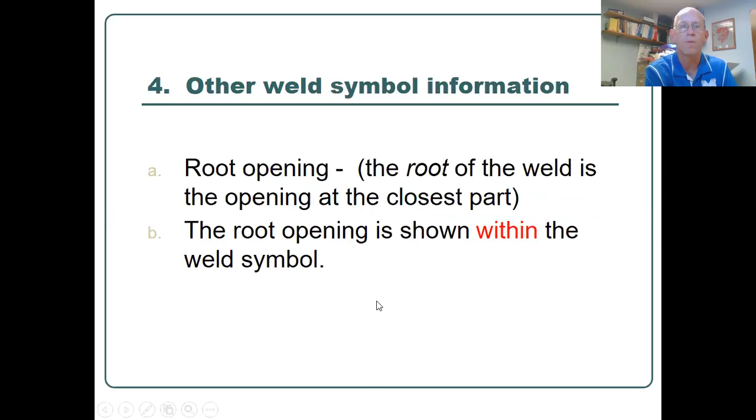So other things that we're going to be able to take a look at. We're going to take a look at specifying the root opening for a weld symbol. And of course, hopefully you know that that means that it's the opening at the closest part, usually at the bottom of the weld, although if we're doing something else, it could be the top part. But the root opening is going to be a number that's shown within the weld symbol. So in this case, it's the 1/8 inch.

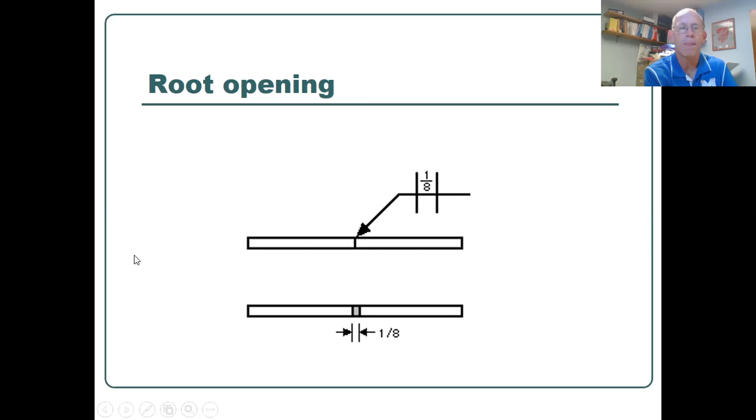That's a square groove weld. And when we finish it, it's going to have an 1/8 of an inch gap in there. We're going to weld on both sides because the symbol is on both sides of the line. But obviously, the 1/8 inch gap is going to be the same with both of them. Every one that I will use will be in fractions. I'm told that like hay and forage, they use metric. So that could be in millimeters. And so you'll see those in that case also.

Let's take a look at this one. You got 3 different numbers there. Which one of those is the root opening? Is it the 1/4 inch, 3/8, or 1/8 inch? Well, if you listened, it's going to be mostly a fraction, and it's always going to be in the weld symbol itself. So in this case, it is the 1/8 inch.

If it is not indicated, and that should be an important thing that you put on your notes, then it's going to be a 0. And so sometimes we're not going to specify. If the engineer doesn't want there to be any kind of a root gap, then they'll just leave it, and you should know that that would end up being a 0 at that point. Okay, so that's one thing we can show within the weld symbol.

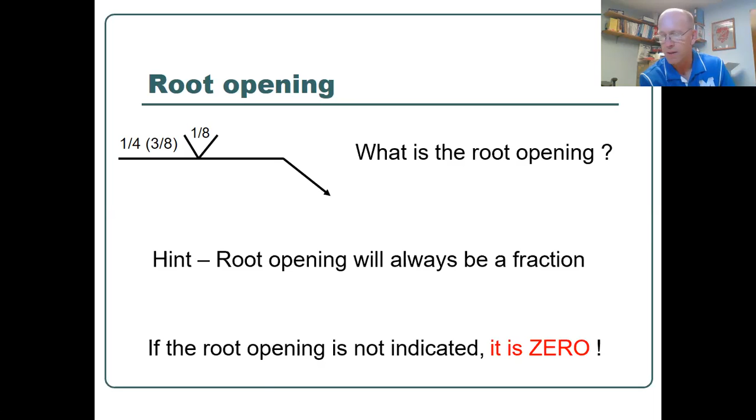The other thing is the groove angle. So for definition, those need to go into your blanks there. It's the included angle or the total angle, and it's shown above or kind of within the basic weld symbol itself. So the example we have here is a 60-degree angle, and we're going to have a V groove. It's below the line, so it's arrow side. The arrow is pointing to the top, so this would be correct in placing it on the top.

And we're going to bevel both pieces of metal with a track torch, a grinder, or a plasma torch, or something like that, and put a 60-degree bevel in there, 60-degree included angle. So we're going to put a 30-degree angle on both pieces. That adds up to 60. And so go ahead and sketch it on your notes page. There's a place there that says sketch these. So go ahead and show that. Hopefully that'll help you when you come back to having to do some problems with it, okay?

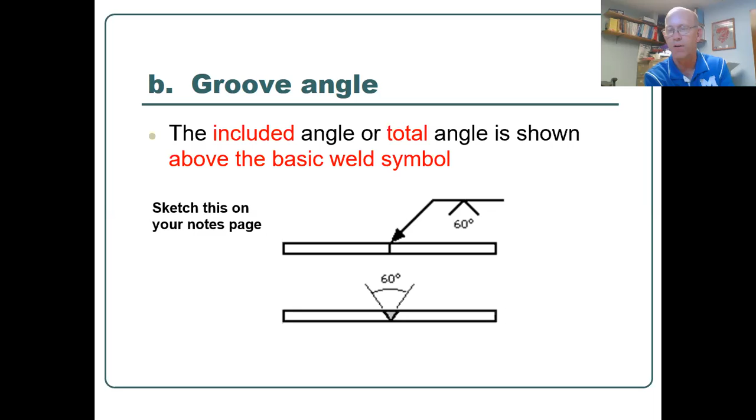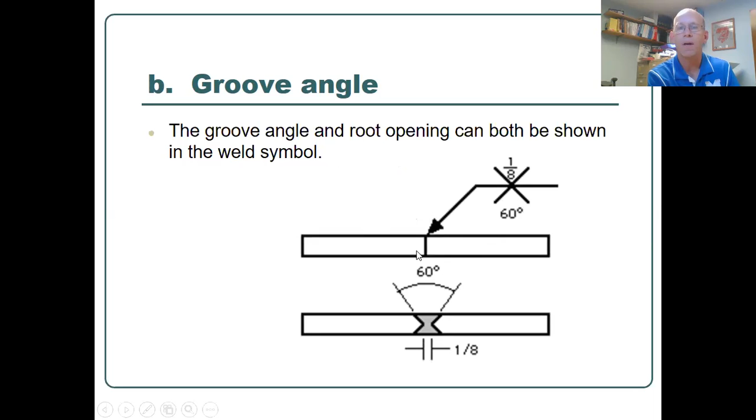We're gonna move on to the second part. Oh yeah, this isn't in your notes, but groove angle and root opening can be shown in both. So here we have a pretty thick piece of metal probably that we're going to put a V groove on both sides, and we're gonna have an 1/8 inch in the middle, and we're gonna have a 60-degree opening. We would assume that would be on both sides, but I have seen them where you would indicate a different one. But if that's what it would be on this one, I would put a 60-degree bevel on both sides halfway through.

So now this is the one that's on the bottom on the right hand side of your notes. Go ahead and take a minute and sketch what this one would look like. Where would it be beveled, top or bottom, and what would the angle be? So pause this if you need to and sketch that in real quick.

And I will show you what it should look like. We'll have a 40-degree angle. The arrow is correctly pointing to the right-hand side, so that would be the side that we would bevel. We always want to bevel the side that the arrow is pointing toward. That's what the engineer would want.

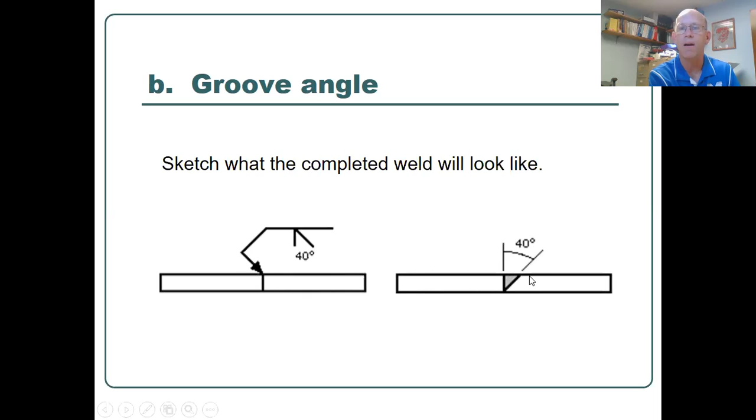All right, on to your next page. Should be a second page of notes. Contour symbols: we may want to indicate a certain shape of a weld that is finished. And so again, you want to sketch these in that space below where it says flush. Flush, another way of saying it is just flat. We want to get it flat, so that we can weld it to where it's pretty well flat. To get it perfectly flat, obviously we would need to grind it.

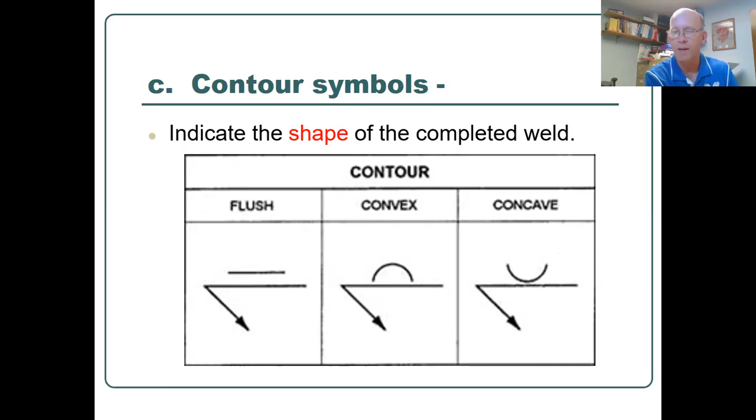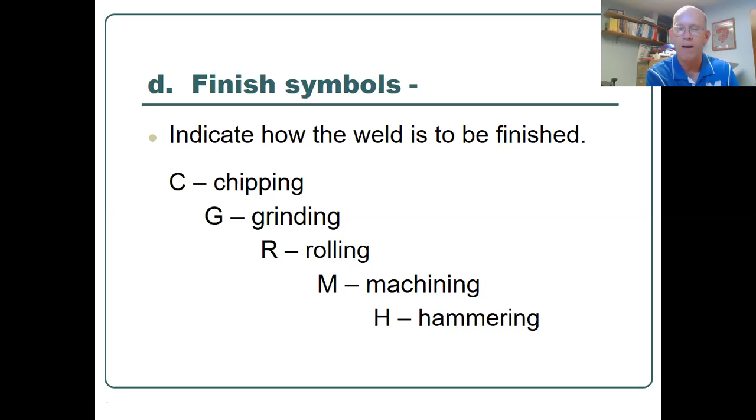But again, you might write that down. You'll need to know this, and I would hope that you could refer to your notes when we move on through that. And then we can use them in conjunction. Again, this isn't in your notes, but just something to look at. We could show that we want a flat on the bevel face. And notice how these are situated too. When we show them, they should be on the face of the weld.

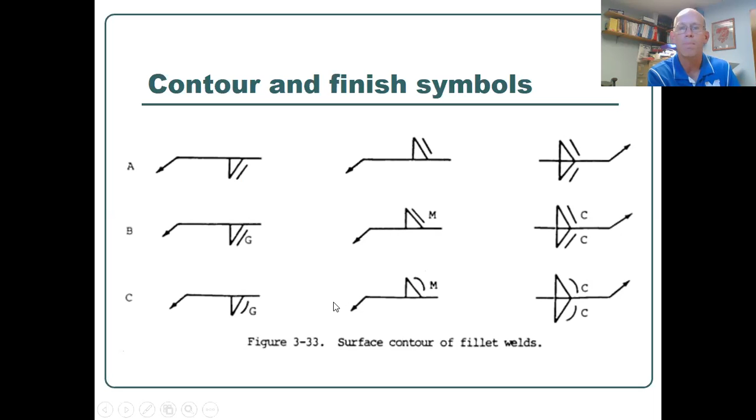So on a fillet weld, your contour symbols go on that angled piece because that's where the weld face would be. And so we could indicate them on both sides. This one would be other side. This one on the left-hand side on B would be the arrow side. So just a little graphic to show what those would look like.

All right, let's talk about the size of a weld. It's really, really important that this is different if we have a fillet weld, which again is a 90-degree, or some kind of a groove weld where we are beveling or putting two pieces of metal together that we're butting up. If we're doing a fillet weld, that's going to refer to the length of the two different sides. Okay, so the length of the sides is going to end up being the fillet weld size.

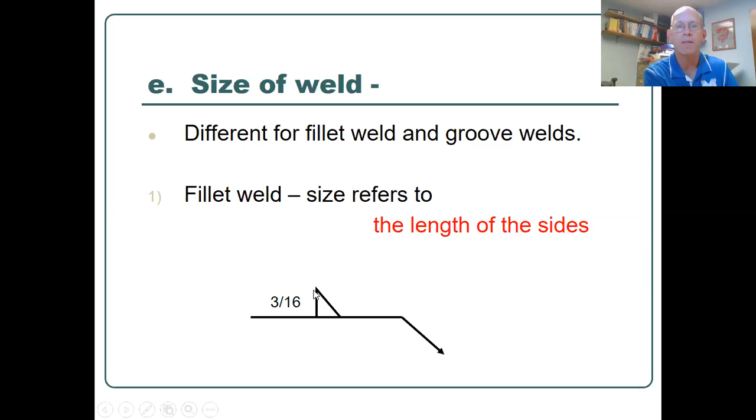So for example, if I have a 3/16 here to the left, that means that this vertical edge and the horizontal edge are both going to be 3/16 of an inch. This one's a little bit different. The 5/16 would indicate that it is coming out and up 5/16. It is not the face of the weld. And so if you have a weld gauge to size these, that's an easy way to indicate what that size should be.

And as you get into more advanced welding skills or competitions, you'll need to be able to get the right size of a weld. 5/16 is a pretty good size weld. And important to note, very important to note, the size is always to the left of the symbol. I already have that there on your notes, but I would sure put a star beside that or circle it. I always have students that come back and say, where do I indicate the size? Well, I told you to star it on your notes, so I'm telling you, put a star beside that. You've got to know that.

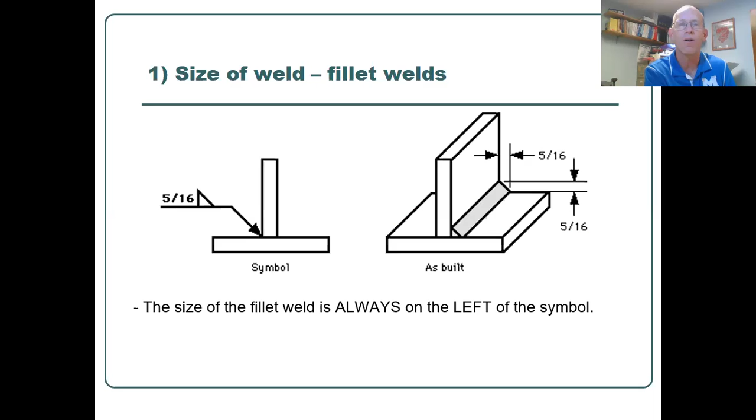All right, here's where it gets tricky. If only one number is given, which is normally the case, the length of both sides is the same. That's almost always what you see. So just like that 5/16, it's going to be the same on both sides.

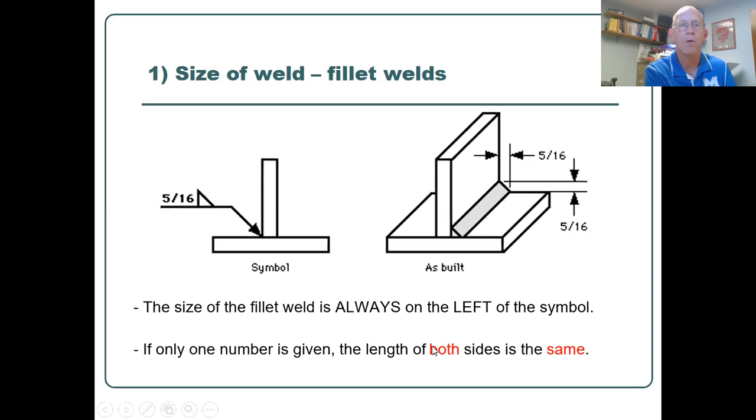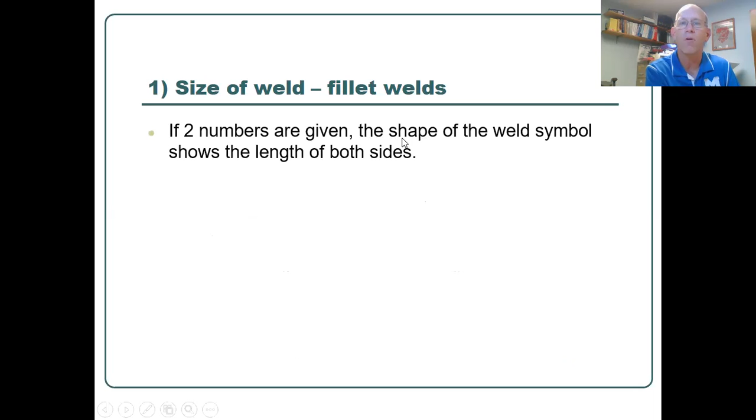So the vertical leg and the horizontal leg are the 5/16 of an inch. But if we give two numbers, then the shape of the weld symbol shows the length of both sides. Please underline the word shape, and hopefully we'll refer back to it, the shape of the weld symbol. So let's take a look. This one doesn't do a really good job of showing that, unfortunately. I should have a better graphic.

But if I have two numbers, 1/4 or 3/8, which one's bigger? The 3/8 of an inch is a bigger one. And so we would draw this symbol to where that line would extend out a little bit more and be a little bit flatter. And so you should be able to look at the symbol itself and understand that that was going to come out a little bit further.

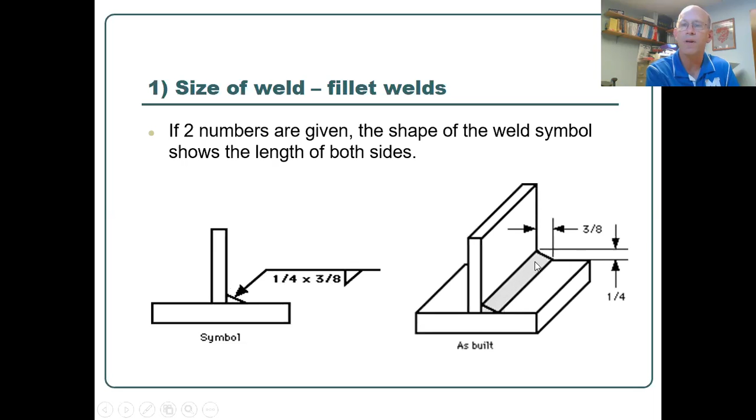There's a lot of reasons an engineer might want to do that, not just to make your life miserable. But this is how the weld would look if we were to finish that up. Again, we come out 3/8 of an inch, only up 1/4 of an inch. So not a big difference, but yet it would be significant if that's what the engineer wants.

All right, now, groove welds, two pieces butted up together. When we talk about the size of a groove weld, it's not how big the weld is. Size means how far are we going to grind or cut the base metal. So it's the depth to which the base metal should be prepared. Either we're going to do a cutting operation with a plasma torch or a torch, or grinding it with a grinder, which can take a long, long time.

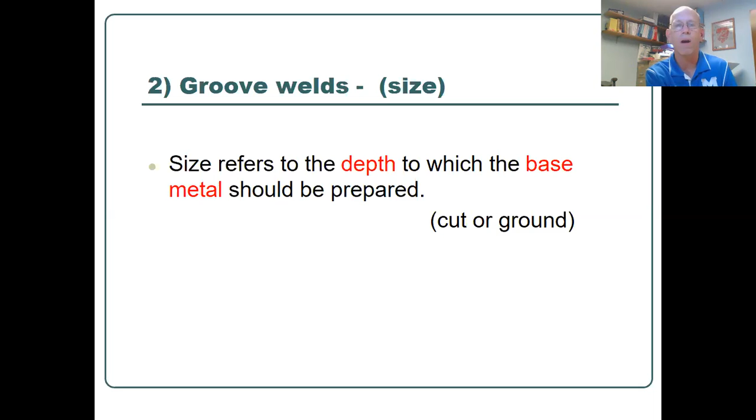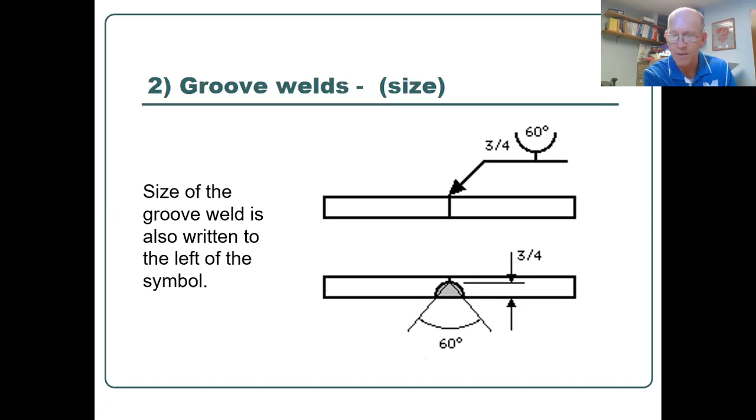It should also be written to the left of the symbol. Okay, so again, fill in the word left on your notes there. And again, that's important to know that.

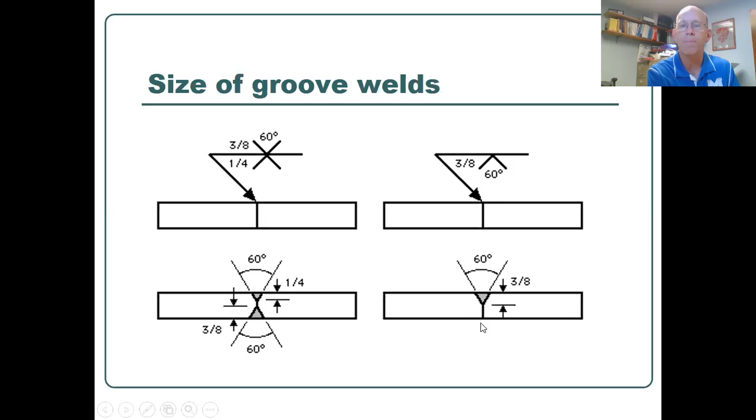So here's a couple of graphics, again, that indicate several things. It can be different. On the arrow side, we've got a 1/4 inch depth that we want to V-groove that out, whereas on the other side, we're going to go down 3/8 of an inch. And there's still a fair amount of material left in between there. Whereas on this one on the right, you've got the 3/8 of an inch. That's all the deeper we're going. We're not putting a weld on the other side, so apparently that's going to be strong enough for what they want to use that for.

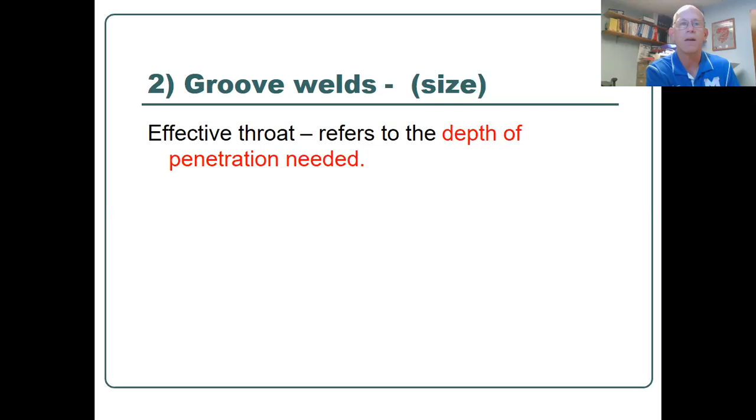Now, this term of effective throat, I've got it highlighted in your notes, and I think you ought to put a star beside that. The effective throat means how much penetration do I need into that weld? Again, we're talking a groove weld. So if we're doing some kind of a weld for a bend test, we would need to have it melt all the way through. So penetration is how far does it melt into the weld, but the effective throat would indicate to us how much penetration we want.

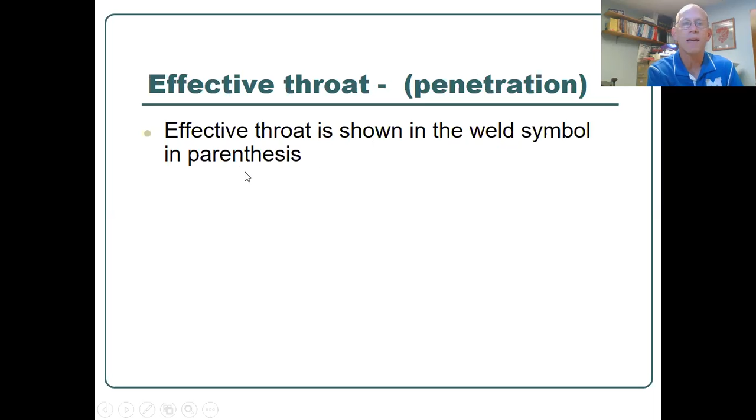A really important thing to help you identify which is which, it's always going to be shown in parentheses, and you need to write that down, that it's going to be in the parentheses, or circle it. I guess it's on your notes. But that's another one that gets really confusing for people. But it's an easy one to find because it will be in the parentheses. I'll show you some examples here in just a minute.

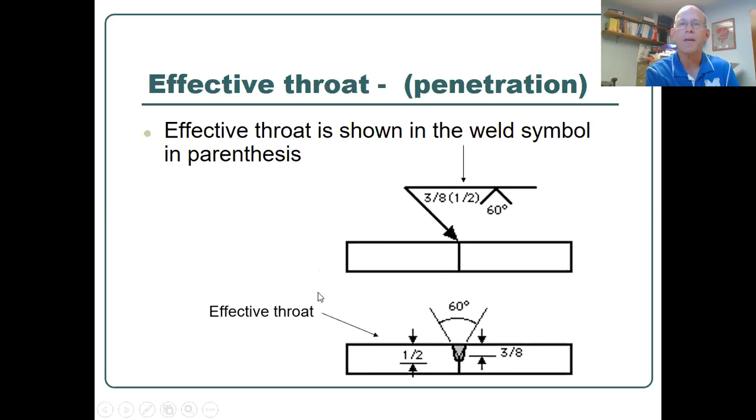Another one that is going to be tricky, that I catch a lot of people on: if it's not specified, the effective throat is, you would assume, the entire thickness of the metal. And on the worksheets that I give, if you don't tell me that, you've missed that point. So make sure that you understand effective throat.

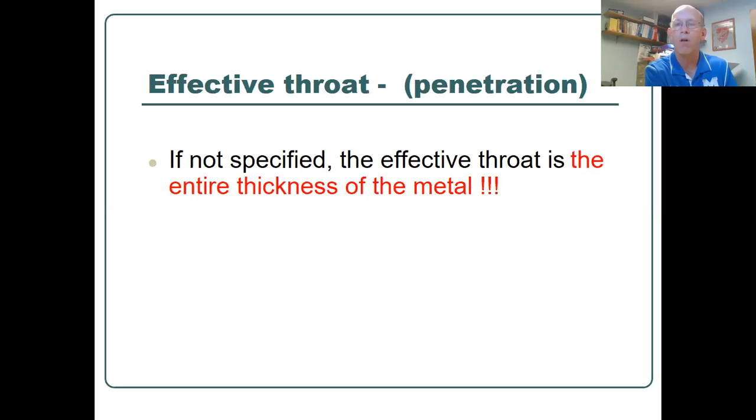If there's nothing there in parentheses and there's only one fraction there, the effective throat, the engineer or whoever's designing that wants you to make that melt all the way through the entire piece of the metal, like you would for a groove weld for a bend test or something like that. Okay, so hopefully we understand effective throat and the size. Size of fillet weld is different than the size of a groove weld. That's going to be challenging, I think, when you try to go back through it.

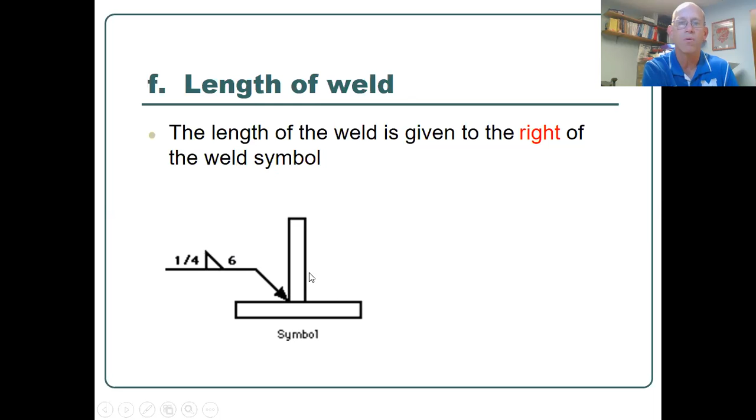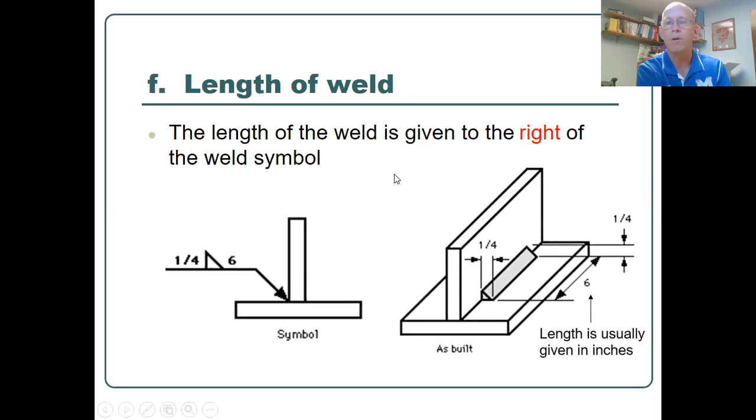So what would that look like? I guess you'd put it in the middle. There's some ways in which engineers might tell you they want to put it in the first half, but usually we're going to weld the whole thing, or we're going to weld a piece, skip, and then we'll put another weld in, which are intermittent welds, which we'll talk about here in just a minute. Normally give that in inches as well, unless you're, again, using metric, and then you would use metric on all of it. So let's talk about that.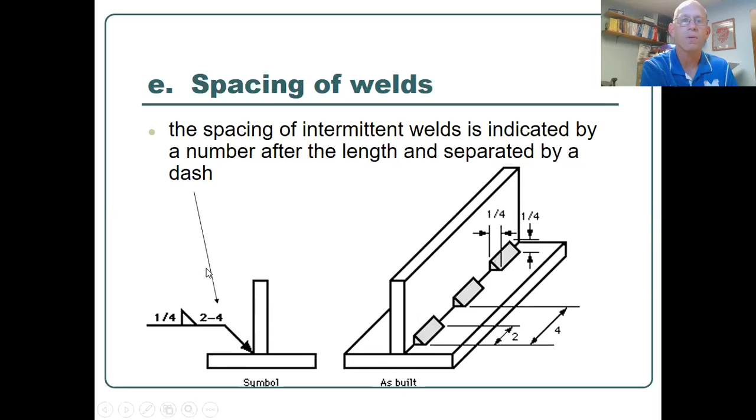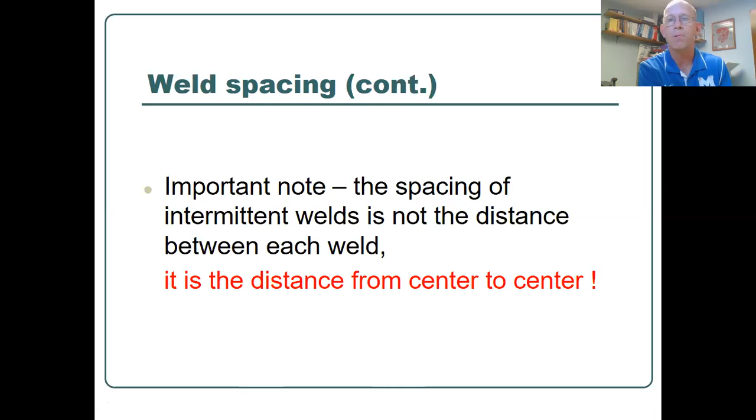All right, so it's important to note, and I've got that there on your notes, that it's not the distance between each weld, but it's the distance from center to center. Another thing I would add, it's also the distance from the beginning of the first weld to the beginning of the next weld. If it's the distance from center to center, it's also the distance from beginning to beginning. When we lay out materials like that, we'll measure them out. We'll just measure out that distance and put a tack everywhere where we've got that spacing where we want it to go. So we'll put a little tack weld there.

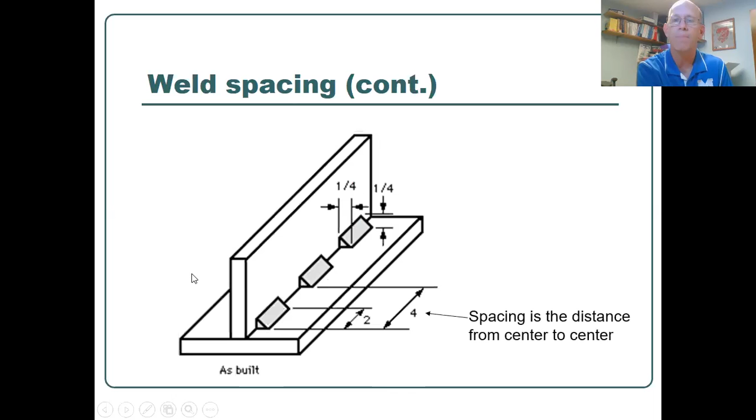So in this case, I'd come over, looks like they came in 1 inch. I'd put a tack at 2 inches. I'd skip 4 inches, put another tack, skip 4 inches, put another tack, because every 4 inches. So if you think about it, that means there's 2 inches, then there's 2 inches in between. Another 2-inch weld and 2 inches in between is how they're wanting that to be welded. But you just tack it up. We'll measure that if it's a long weld. Okay, so spacing is the distance from center to center, or from the beginning to the beginning of the next weld, is the easy way to set it up.

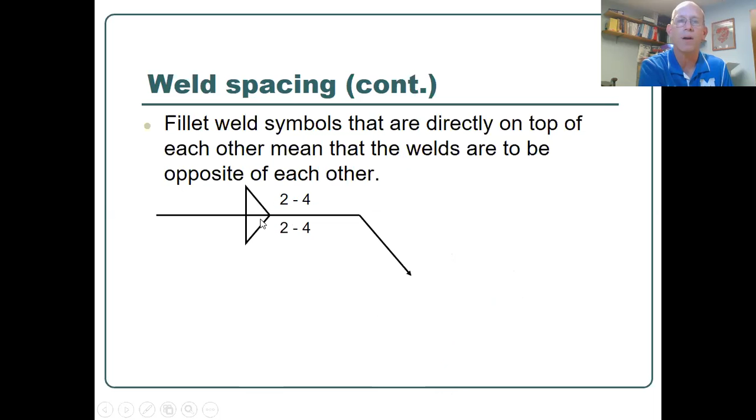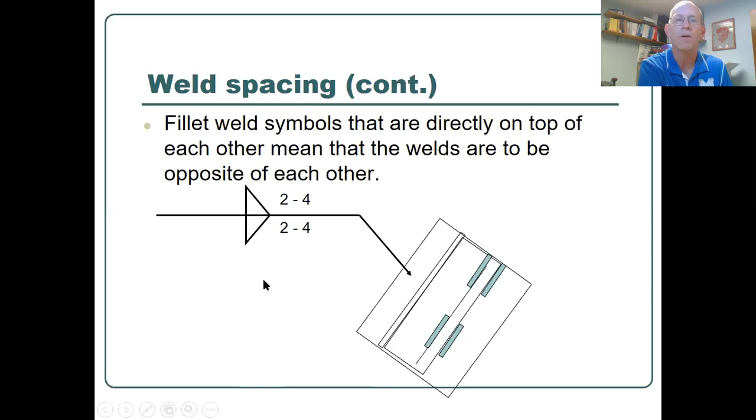Okay. Sometimes we do want them to be directly on top, and so in that case, the weld symbols will be sitting directly on top of the other one. And again, we would probably space them the same way. And again, poor job of drawing it, but we would do exactly opposite of each other, and probably would want to put a third weld in there. So that's probably not really realistic about how we do it.

Okay, weld all around symbol. Sometimes we have a tubing or a square piece that's going to go all the way around.

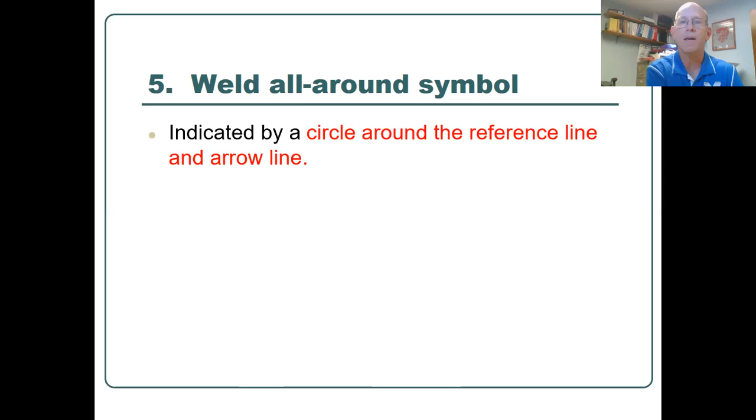We just put that circle around the reference line and the arrow line, so it looks something like this. You might want to draw a quick arrow that's got just that circle. That's real simple. That just means instead of saying I got to put this in 4 places, I'm just going to weld all the way around this piece of tubing. Okay, and I could also specify how big I want that weld to be and so forth. I see this one a fair number of times on stuff that I've done.

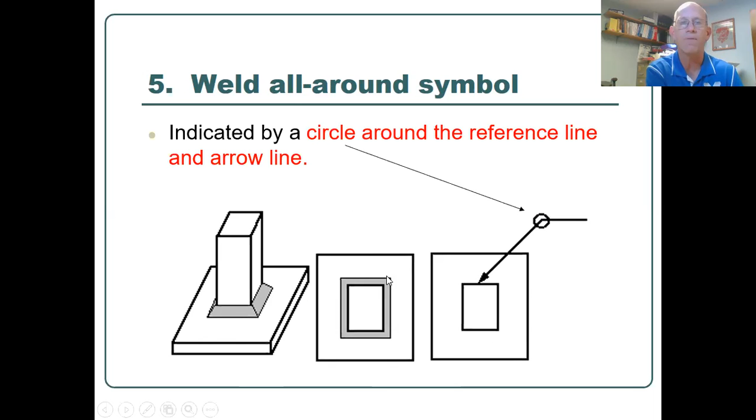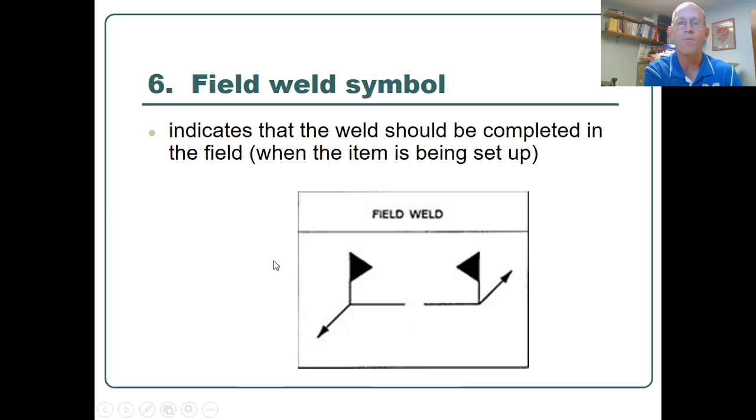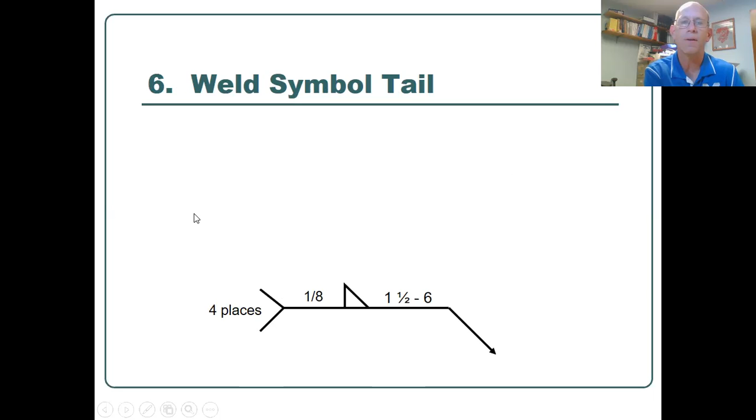So the weld symbol tail itself is going to give us information. You need to write these down. It can tell us the type of weld process, whether it's MIG, TIG, stick, or whatever. Tell us the number of places, which again is the most common one that I see. Maybe you want to specify type of electrode: do you want it to be a 7018? Do you want it to be 6011? What does the engineer want? Or what kind of MIG wire?

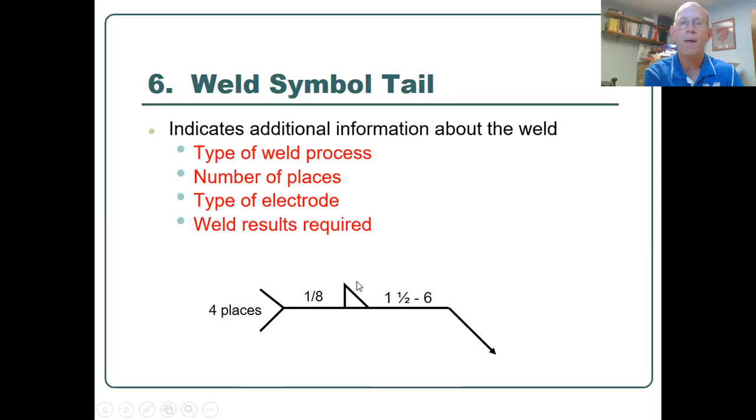And then what are the weld results? Does it have to pass a bend test? So what are the results that are required? Maybe you want it to fill flush; again, I've seen that on weld symbols. So those are things that can go in the weld symbol tail.

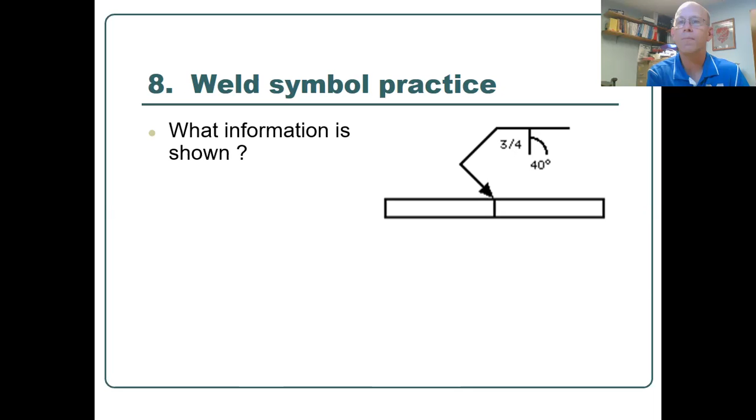So is the weld on top or the bottom? What's the type of edge preparation that we need? What size of weld do we have? Let's see if this comes in here the way I wanted it to. And sketch the final weld. All right, so here's our final weld. We're pointing it to the right. So this is a J groove. That's the type of edge preparation. It's a J groove. We've gouged one side, okay?

The size of the weld: that weld is supposed to be 3/4 of an inch down into the metal. So that's all the further that gouge should be. Looks like there's another 1/8 of an inch left there, maybe even a 1/4 inch. It would depend on the thickness of the metal. We don't care.

What's the effective throat? Good question. Tricky question. Effective throat would be shown in parentheses. So since it's not shown in parentheses, it's the entire thickness of the weld, okay? That 40 degrees means that by the time we get done, we want that to be a 40-degree angle that's included in your weld, okay?

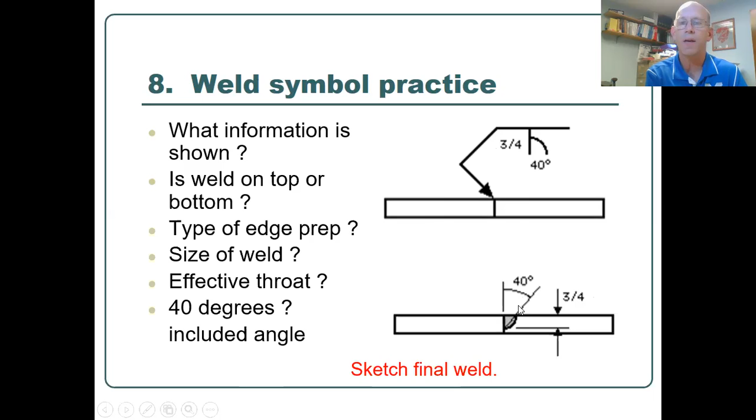All right, last one that's on your notes page anyway is this one. So again, same types of things. What's the type of edge preparation? Oops, wasn't supposed to show that. Let's back that up, and I'll stop there for a second. Have you sketched that? Now go ahead and sketch what that weld will look like. What side does it go on to? And what information does it tell you about? The type of finish, size of weld. Is there anything else that you should be able to tell me based on that weld symbol? So again, I'll pause for 5 seconds and let you draw it. And stop me if you need to.

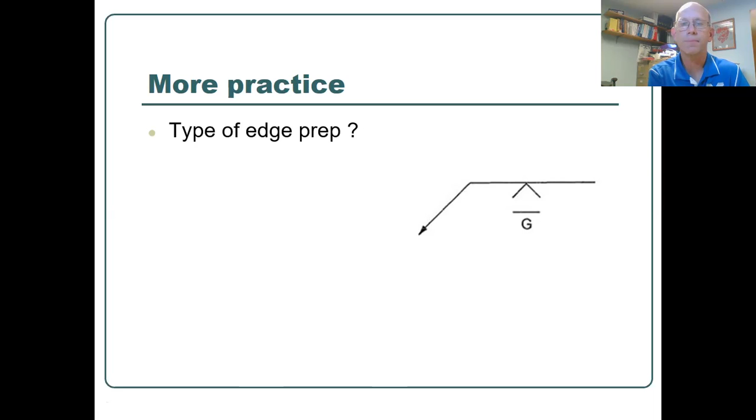All right, so obviously it's a V groove. Does the weld go on the top or bottom of the piece? Well, let's see. It's on the arrow side. Arrow's pointing to the top of the piece, so the V groove would be on the top piece of the metal, since it's sitting on the arrow side. What's the size of weld? Well, not specified, so we're going to be the entire thickness of the metal by the time we get done.

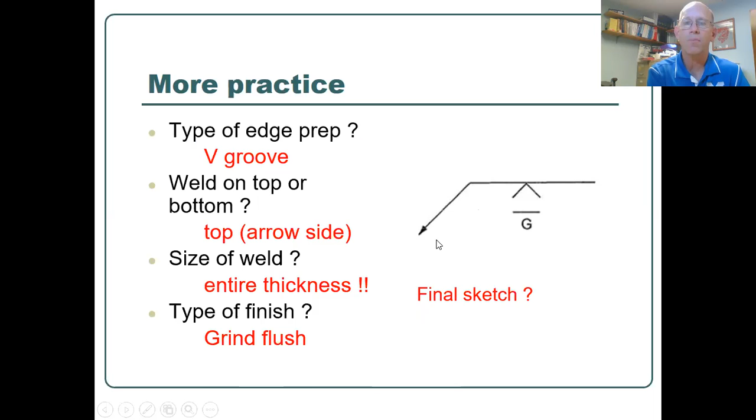Okay, what type of finish operation is specified? You need to tell me 2 things. We're going to grind it, and when we get done grinding it, we want it to be a flush type finish. So we're going to grind it flush. And so there's really 2 things that you need to tell me about that. Okay, and then what would the final sketch look like? Hopefully you've got that drawn. I guess I don't have that. But it would be a weld that would have a V groove sitting here at the top, and again, it will be flush with the top edge of it.

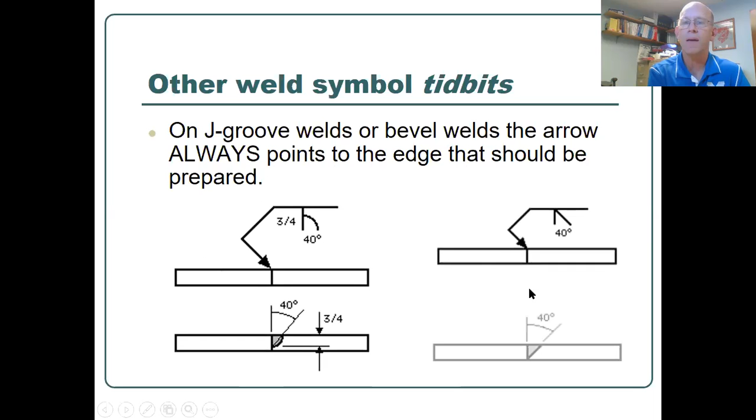All right, real quick, just a couple of things. We've already talked about this one a little bit. The arrow side always points to the edge that should be prepared. In this case, again, it's coming down to the right, so that would be the one that should be prepared. On this one, same thing, it would go to the right-hand side.

So multiple symbols can be used sometimes to indicate different things about the weld itself. Instead of stacking everything onto one line, we can use multiple lines. This one would tell me that, first of all, I'm going to bevel that piece on the arrow side at 30 degrees. And then when I get done with the weld, I also want it to be a 1/2 inch weld up and a 1/2 inch out, and ground to a flush operation. It's going to go all the way around this piece of pipe. And both of these things are going to be done in the field, so it's not going to be something that's done in the shop.

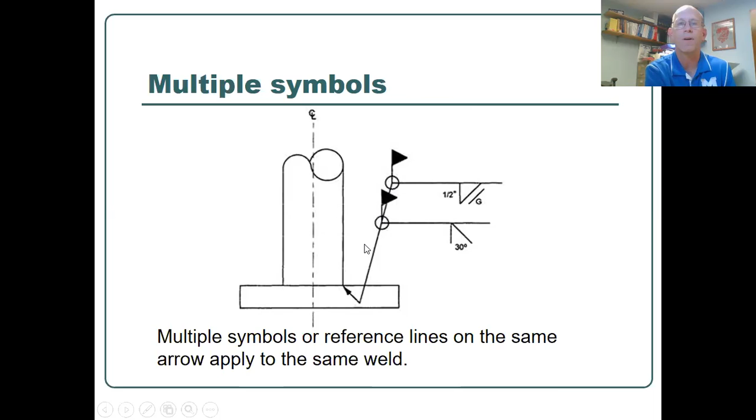A couple other things for you to look at real quickly. This one here, just a basic fillet weld. Since this is on the arrow side, it would go on the right. It's out 3/8 and up 3/8 is the size of that weld. If we take a look at this one, that 2-5 means that we're going to put 2-inch welds every 5 inches. So every 5 inches, we're going to have another weld, and it's going to start at the end, finishing out right there correctly as well.

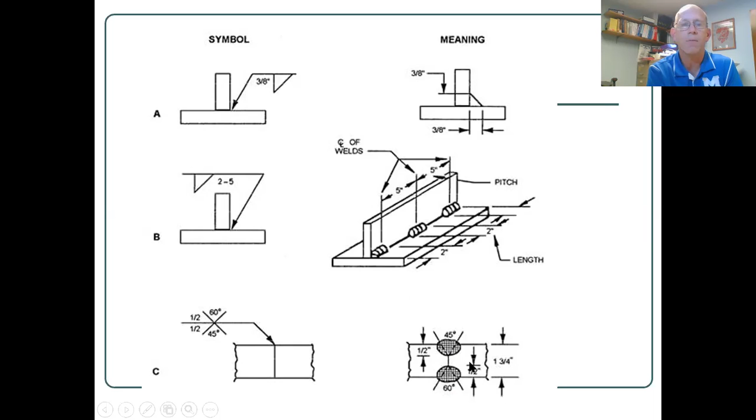And on this one, they have two different types of groove angles. A 45, since it's on the arrow side, is going to be on the top, whereas the 60-degree angle is going to be on the bottom since it's on the other side. That's a 1 3/4 inch thick piece of metal. That's a pretty big piece of metal, okay? If you have a chance to look at this chart, that's a good reference. I also have a few other references for the ag teachers in the notes.

And I would say at this point, you should have weld symbol worksheet number 2, where you're supposed to sketch some welds, and have a key posted in there for the instructors as well. So work through that. I hope that this has been good information for you. And again, I can't stress enough, you need to know how weld symbols work in order to be able to speak the language of the industry. That, to me, is a really important thing that we want to be able to do.